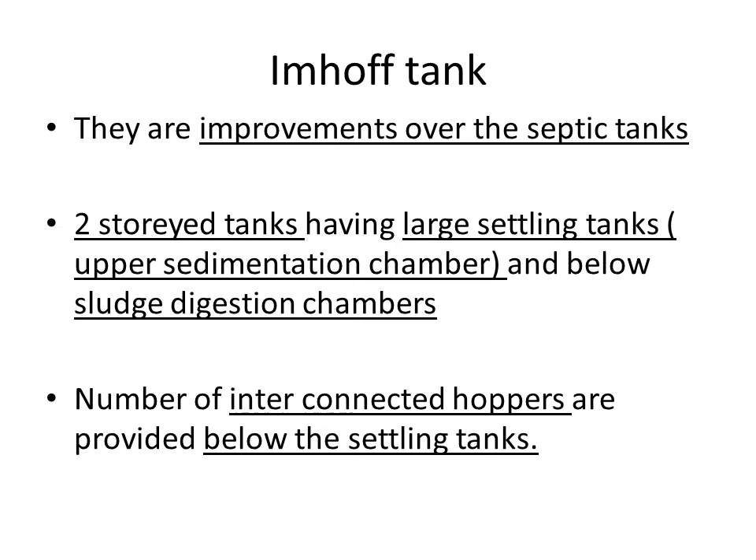That's the sludge digestion chamber, where we can provide 2, 3 or 4 compartments, and the shape is a hopper. The sludge will be deposited at the bottom, and the sludge can be taken out through the sludge pipe under hydrostatic pressure.

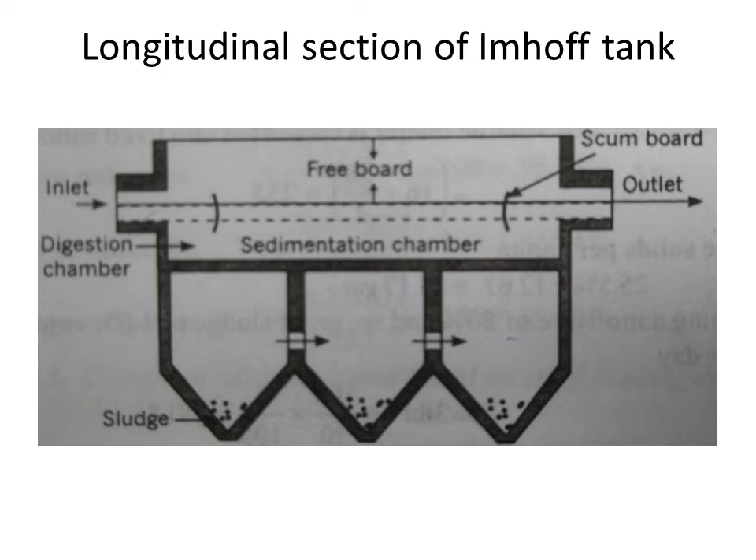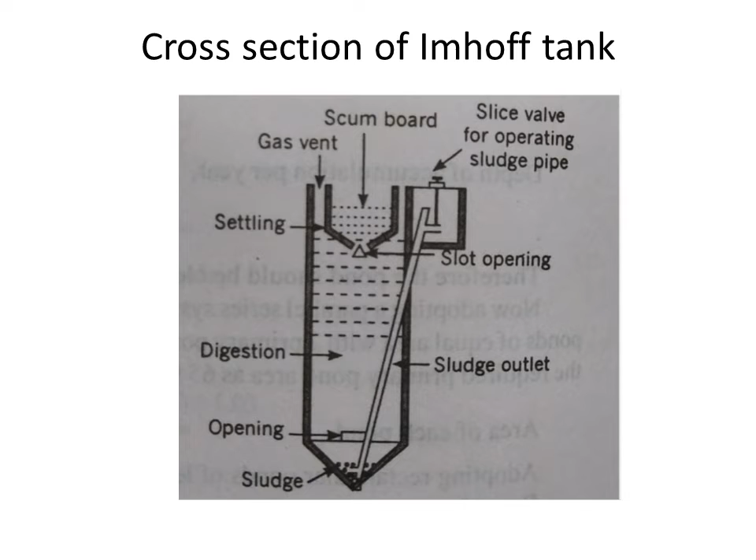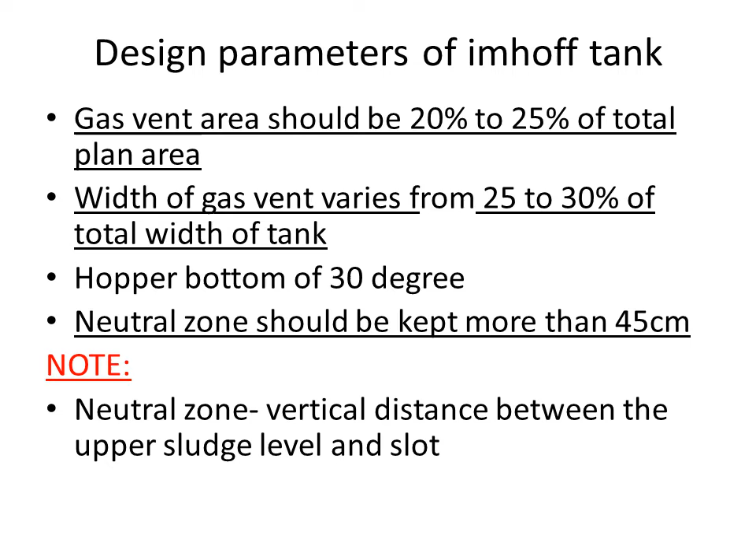So that height, that neutral zone, should be 45 centimeters. So at least 45 centimeters we have to provide. If we can provide more than 45 centimeters, we can provide that.

Now coming to the advantages of the Imhoff tank, it doesn't require any skilled attention during operation. 60 to 65% of solids can be removed, 30 to 40% of BOD can be removed, and there is no problem of sludge disposal as in the case of the sedimentation tank.

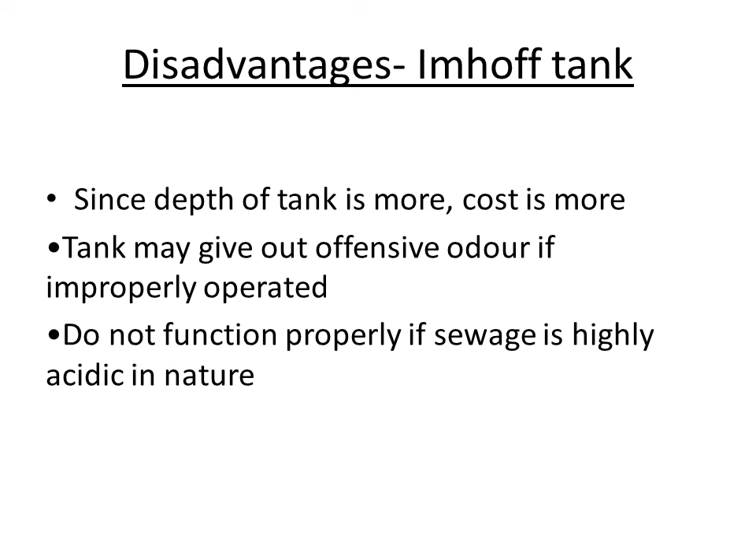And the tank has a tendency to foam, or it boils, which can create a scum on the top of the tank, and it forces the sludge particles to enter into the sedimentation chamber through the inlet. That is another disadvantage of the Imhoff tank. Then foaming affects the quality of the effluent.

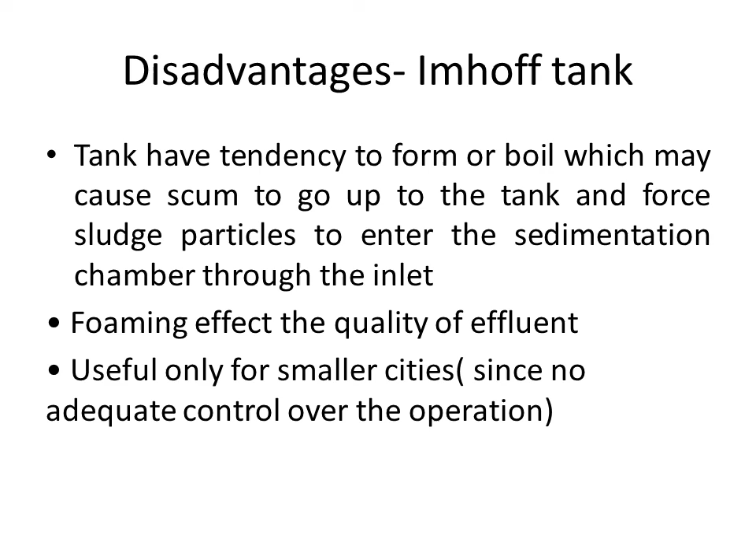Usually we are providing the Imhoff tank only for smaller cities, since there is no adequate control over the operation of the tank.